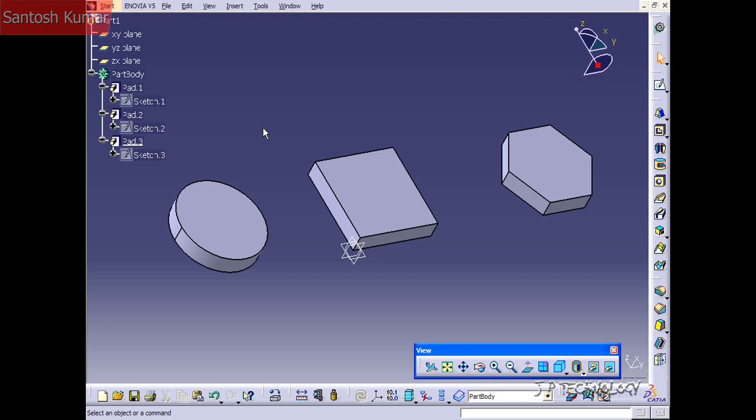So what we're going to be doing is creating a sketch on these solid bodies that we've made, and we're going to do the drafted fillet pad off of it. Now, the drafted fillet pad saves you time as it introduces 3 features into one step. In this one step, you're going to be extruding the part, drafting it, along with adding fillets all over it. So this tool is a real time saver, as it combines 3 steps into one quick and easy step.

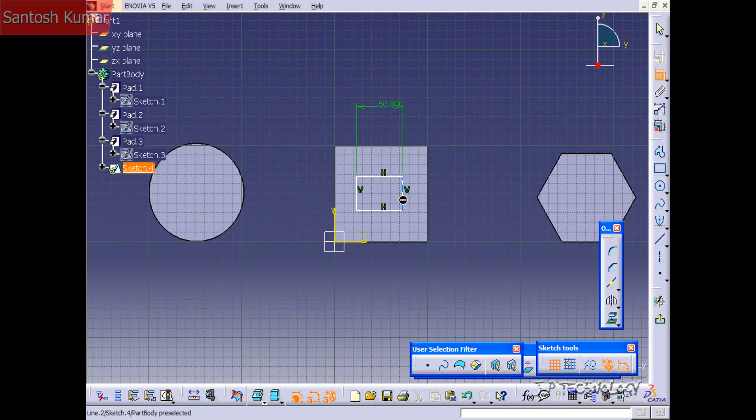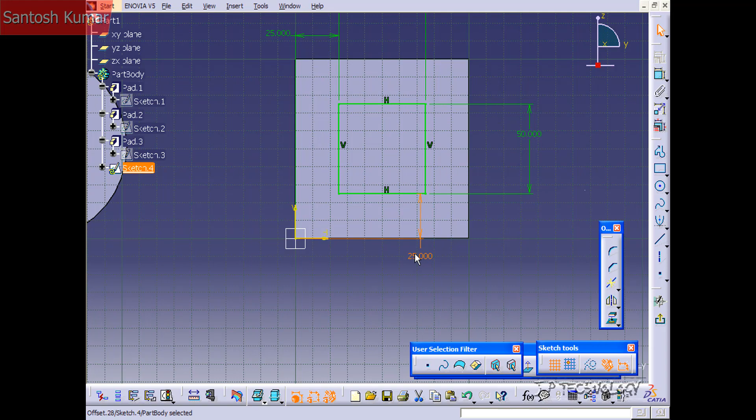So to start off, let's do one on this face here. Let's click this face, click Sketch, and let's sketch a square on the face here. And let's dimension it to 50 by 50. And then let's dimension it from the origin here. So let's make it 25 by 25. Now we've got our sketch right in the center of the solid body. So let's exit this workbench and let's apply the drafted fillet pad.

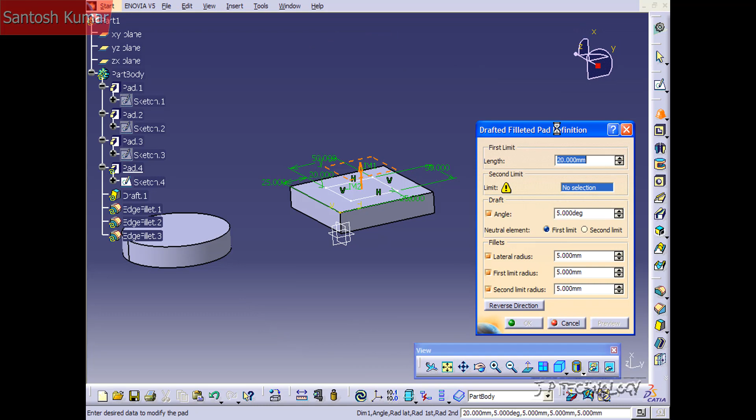So click on the sketch and let's click the drafted fillet pad, and we get the drafted fillet pad definition window here. So we're going to have to go through it and select the parameters. With this type of pad though, you're limited to only doing a dimension. So for the length, you're not able to do an up to or up to surface with it.

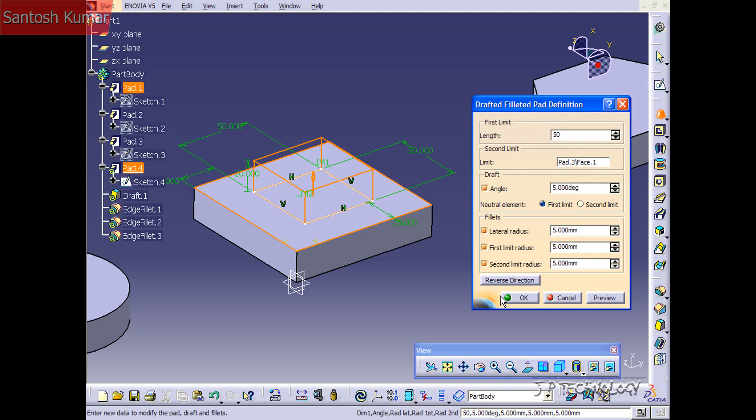Now for the second limit, click the face that you're extruding it off of. So click this face here, and you're able to toggle on and off if you want a draft angle or if you want the fillets. So for now, turn everything on, and everything's set at 5 degrees and 5 mil. Leave that, and let's put this up to 50. Now let's click OK and see what we get. And we get our extrude with the draft and the fillets.

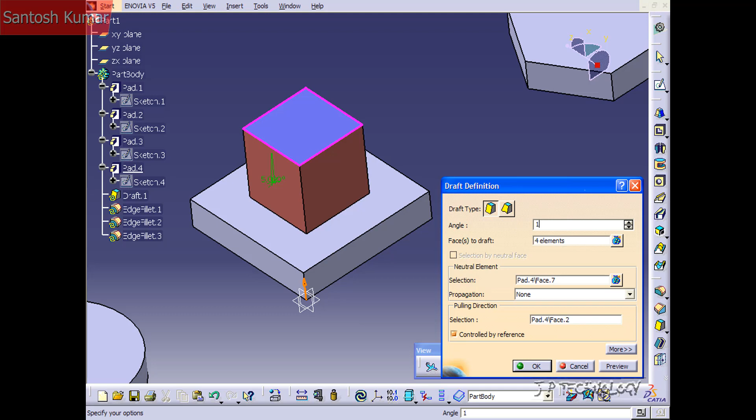Now if you notice, with the draft angle of 5 degrees from the top point here, it drafts it out. And when it creates this feature, you're going to get a pad, a draft, and all of the edge fillets. So from there, you're able to change the pad, the draft, or the edge fillets just by clicking on them. So let's change the draft angle. Let's double click on it, and let's change it from 5 degrees to 10. Click OK. And now you can see that it's kicked it out much more.

Now let's delete one of these fillets. And you can see that it takes it off on all those edges. So you're able to go in and modify the pad, the draft, and the fillets after it's been made. Instead of getting back into this one menu for the drafted fillet pad, each of them creates its own feature under the part body.

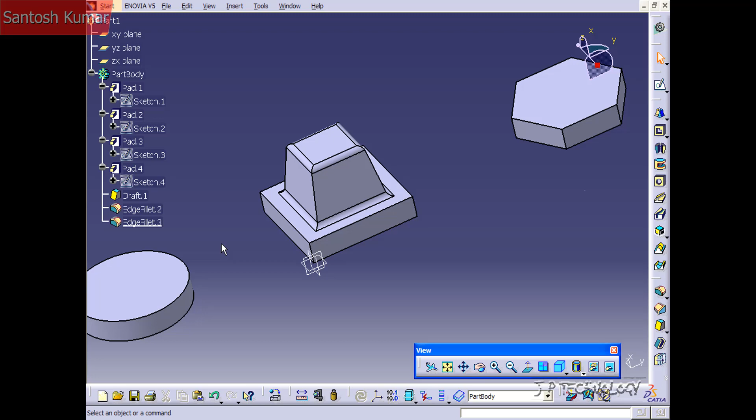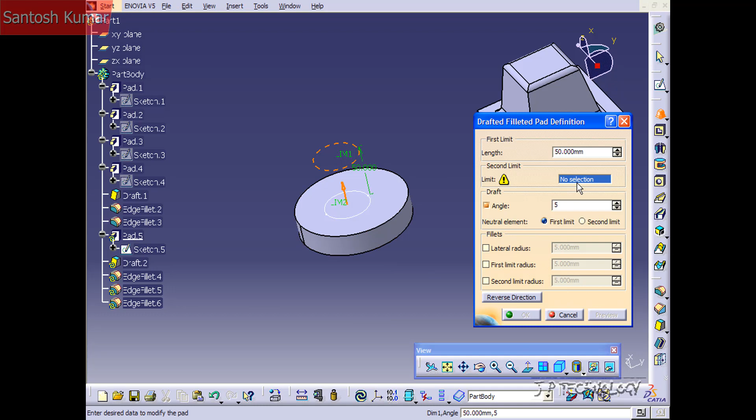So now let's do one on the circle here. Let's click this face, click Sketch, and let's just sketch a circle close to the middle. Don't worry about the dimensions. And we'll go out, click on the feature, and this time let's only make a draft. So we'll take off all the fillets, and we'll make the angle here 5. Now for the limit, we're going to choose this face here, click OK, and now we've drafted this out just 5 degrees with no fillets.

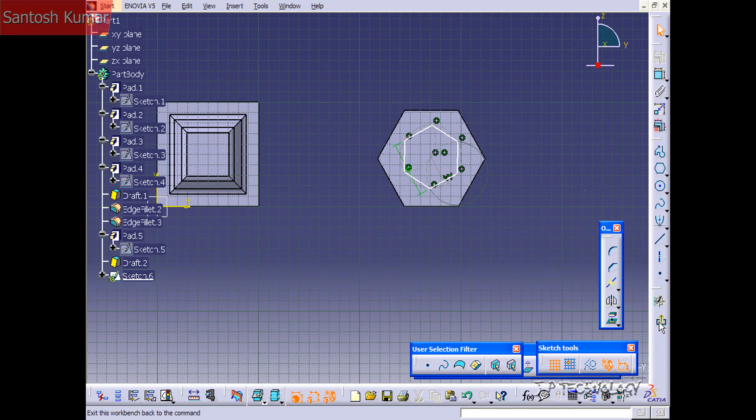Now let's do one last one on this face here. So let's click it, click Sketch, and let's use the hexagon. So click and pull it out. Now let's go back out and let's use the feature. This time let's unclick the draft angle and let's click this face here. So what we're going to have this time is just fillets and no draft angle. So let's click OK. And that's exactly what we get. No draft on it, just the fillets.

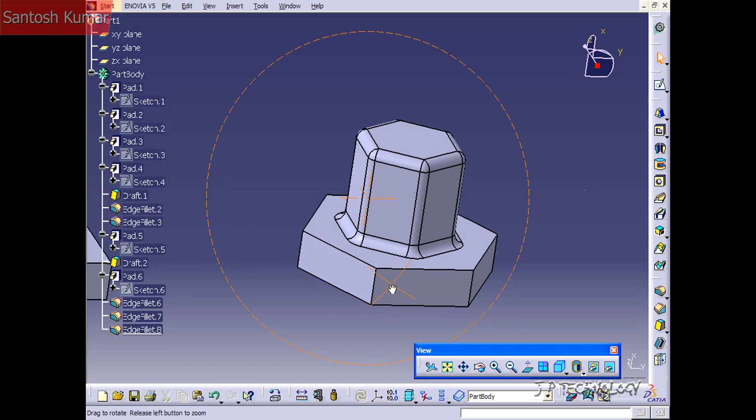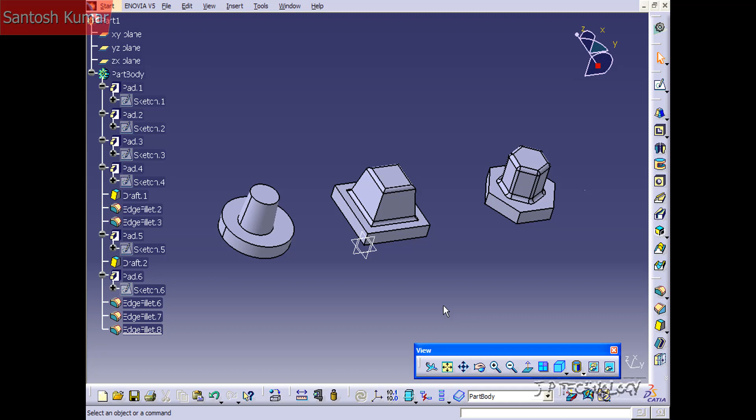So this tool allows you to incorporate the drafts, the fillets, and the pad all in one step. So like I said, it's a time saver, as rather than going through 3 separate steps, all you have to do is one step and you get your 3 features from the one sketch. And that concludes our tutorial on how to use the drafted fillet pad within CATIA v5.